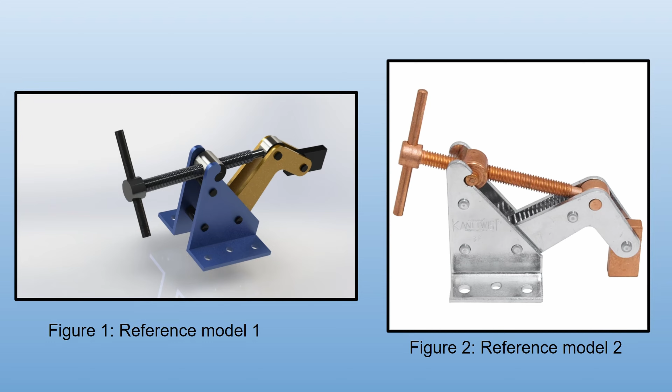Here are the reference models that we used as a guideline to figure out the dimensions and materials used for modeling and assembling the quick-acting clamp. Given how we weren't provided measurements or dimensions, we used real life and intuition to figure out the best material and dimensions for it.

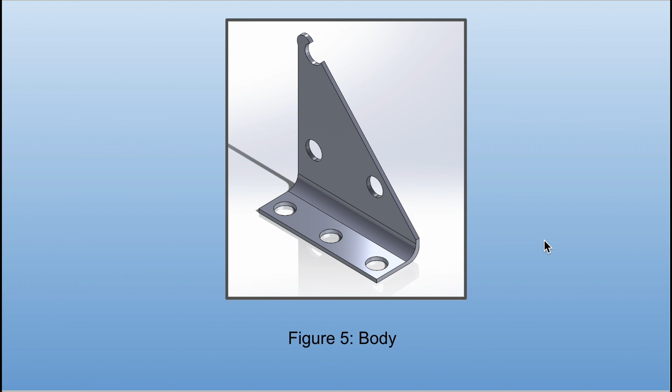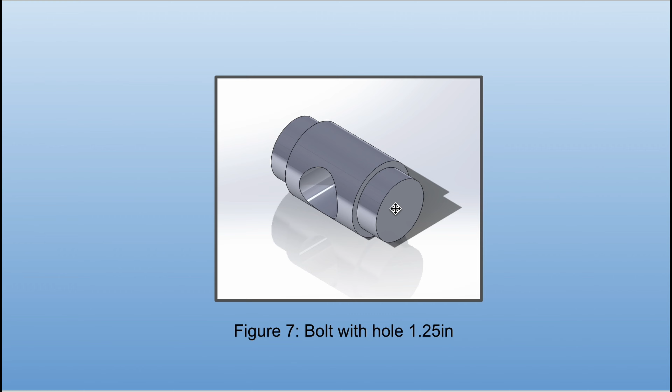It has a hole in the middle. This bolt is also 1.25 on the outside. The only difference is the diameter of the hole here for the bolt. These were all created the same way, just instead with the extruded cut in the middle circle.

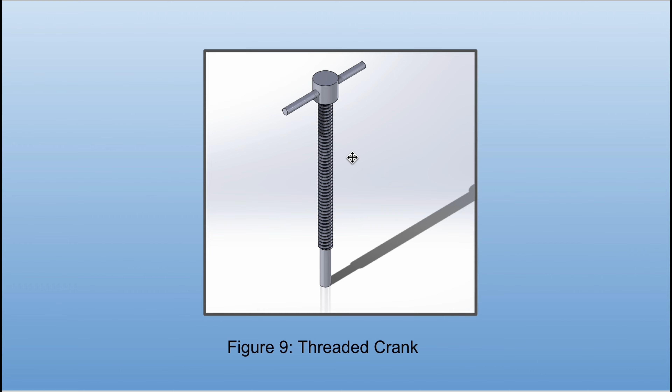And then finally we have the threaded crank. This was sketched and then also revolved, and for this we used the thread tool in SolidWorks. And this is the fully assembled clamp.

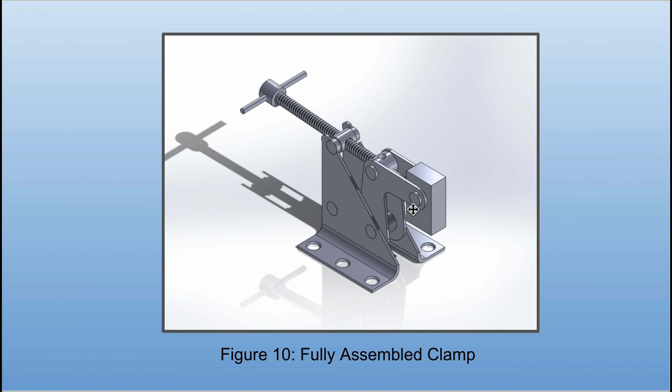As you can see, all the pieces are here together: the main body, the bolts, and the threaded crank. The only piece that wasn't included was this rectangular piece, which is simply just a rectangular piece with a hole in it. And that is it for the parts.

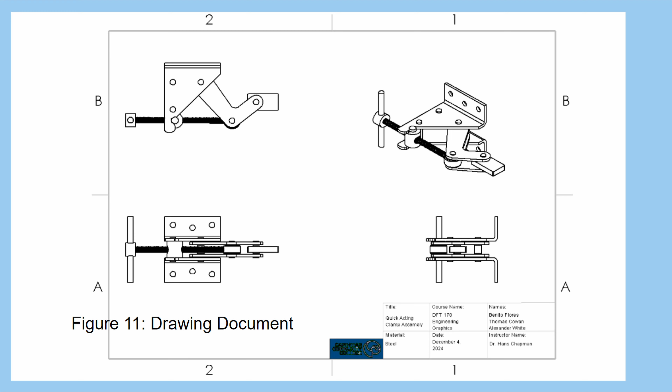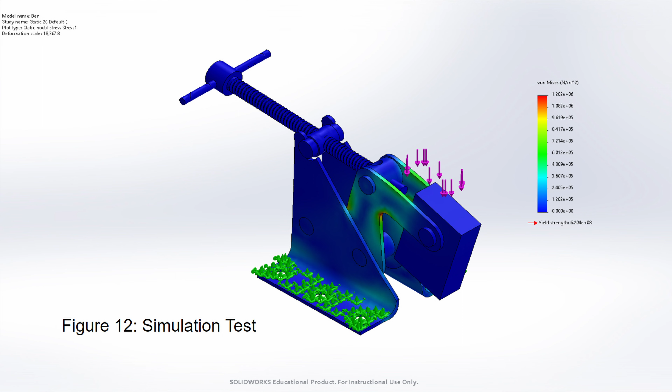For closing remarks, we were given examples of a quick-acting clamp, and we had to go online and sketch different parts for this. After that, we 3D modeled each of the different components and put it into assembly. We then had a drawing documentation of the whole entire clamp. After that, we did simulation of stress tests on the clamp, and we showed an animation at the very end.